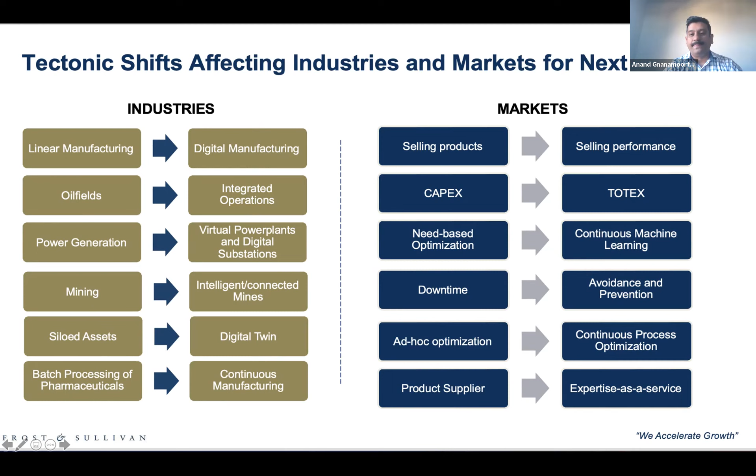This is a busy slide. There are several things driving adoption of IoT technologies and the changes happening in the manufacturing segment. Obviously the biggest one is digital. We see digital solutions being leveraged by the manufacturing segment, digital platforms coming up, and assets being integrated.

Number two, we are moving from capex to totex. We see focus on a service economy rather than a product economy. From a solution standpoint, number three, we are seeing a move away from proprietary technology - the traditional MES, DCS, PLC and SCADA solutions were proprietary. We are going more and more towards open standards.

There is focus on digital threads that can weave across the different silos in the company and provide a unified solution. We're seeing new business models - that's what the entire webinar is about, how channel and different ecosystems can help customers come out with new business models, looking at solutions or ideas on outcome-based solutions.

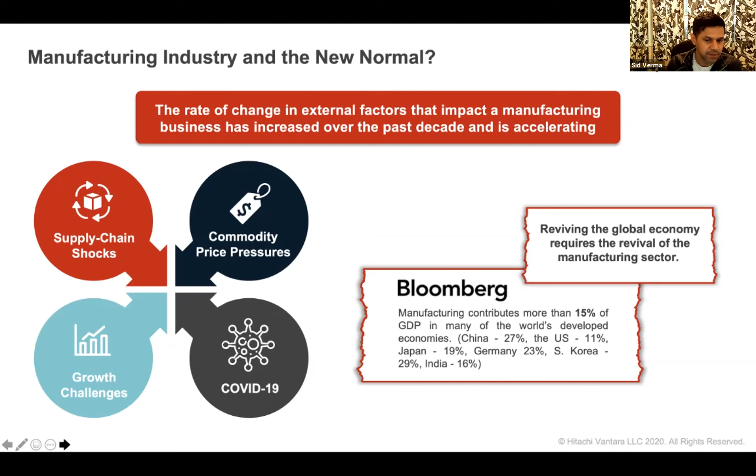So as we started believing this needs to be done, the important part is how do you start, where do you start, and where do you put your first steps in. I'll try to take the time today to talk about some of our own experiences, and maybe it will be helpful.

Next slide, please. So just to give you a background on Hitachi, I'm guessing Hitachi's name is quite familiar to everybody in the world. It's a big brand, 110-year-old Japanese company. It has a heritage across many industrial verticals. The Vantara business represents the digital business of Hitachi Limited, and brings over 60 plus years of IoT and IT experience to that industrial heritage.

Essentially, what I'm trying to communicate is we are also a manufacturer at heart. We have scores of factories, and they are also spread around the world. And we face the same challenges and dilemma as we try to transform ourselves digitally, and also try to deal with the same shocks that everybody else is dealing with.

Next slide, please. So I'll start with a description of what we call the intelligent manufacturing journey. This is, as you can see, a step-by-step process, but it typically is an iterative process where you learn and you improve. This is the journey that Hitachi has taken for itself as we have gone through our own digital journey. So we are proud to share some of the learnings as we go forward, and also improve as we go ourselves.

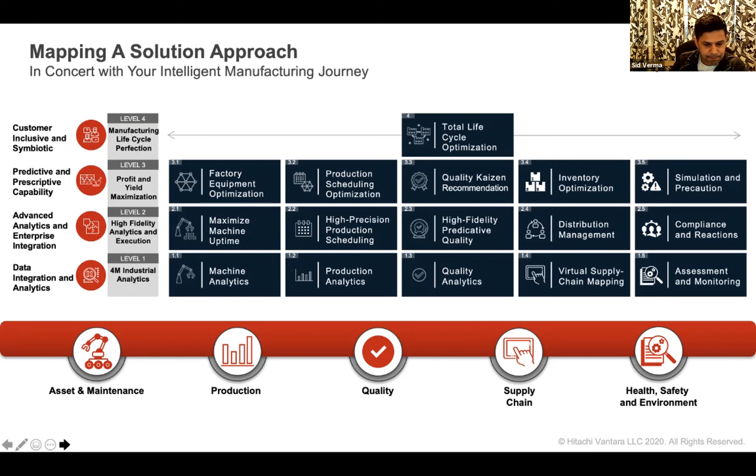So the solution modules, as I was showing before, are kind of a building block. We build organically as need requires or ROI requires, and they are interlinked in the sense that you can build on top of each other and start getting more and more value, getting up the staircase to value, as I was saying earlier. On a technology front, the way we build these things are microservices, so you can functionally and technically add it onto the system. And of course, these things can be deployed on the edge, on-prem, or on the cloud, whichever is best suited.

Some of the base capabilities you'll find here are technologically like a foundation, and some are functional. So we like to think about it that way, and then the functional elements drop on top.

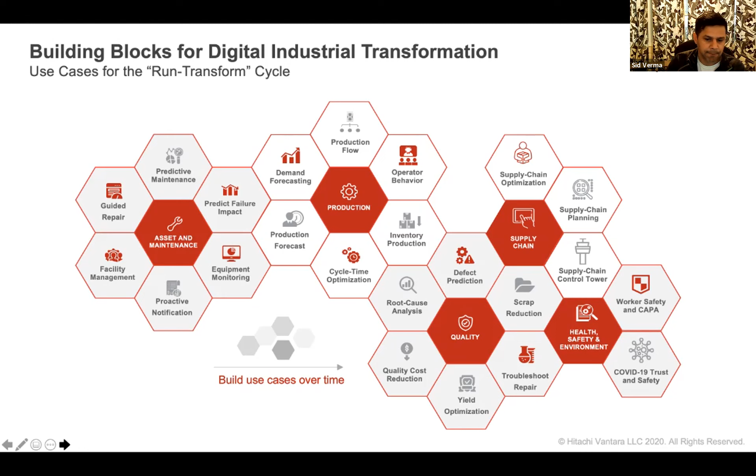So typically what we have shown so far helps you get started on the digital journey, like aligning functional elements to ROI for the client. But the important part then comes at how do you scale it?

Scaling has been a difficult element for most of the partners, our clients, and even the vendors. POCs work great, they show ROI. Scaling is where things start to fizzle out and you start losing the value. So for us, creating a path to scale is what we have started calling mass customization.

The important part for us as we start on this mass customization journey is to make sure we align to how the customer sees the world. On the right side, you can see they typically have their own environments in which they live and breathe, and functionally they're operating in those same solution areas - maintenance, supply chain, health and safety, quality. And they have officers and managers who run those areas.

For solution providers or transformation agents, we need to make sure we align our offerings and our sales to what the customer actually sees. So typically there are two challenges when you get into this.

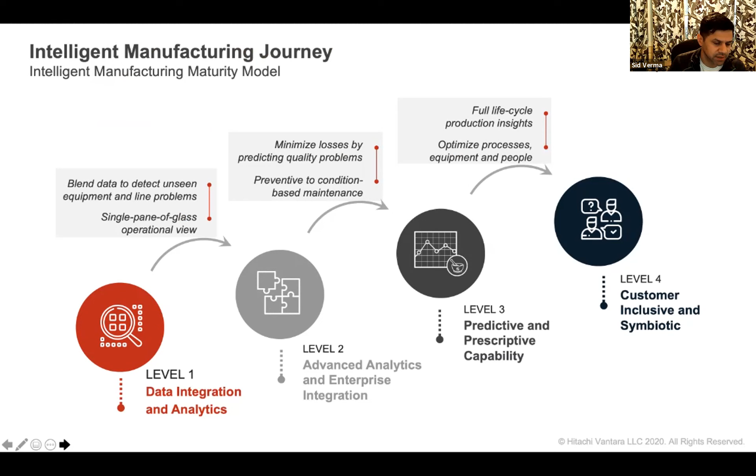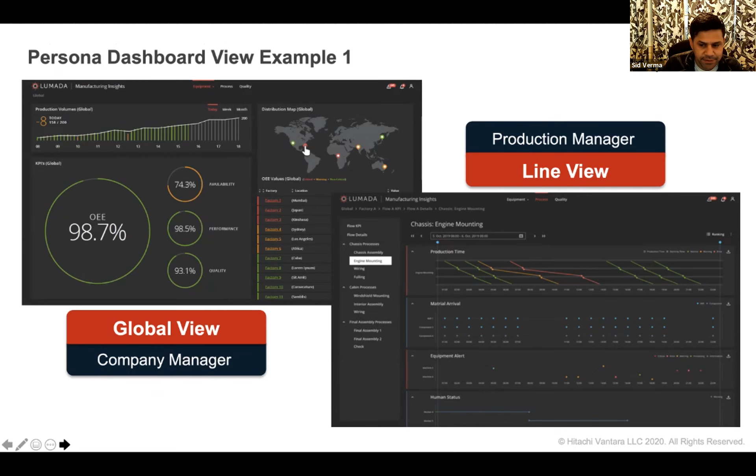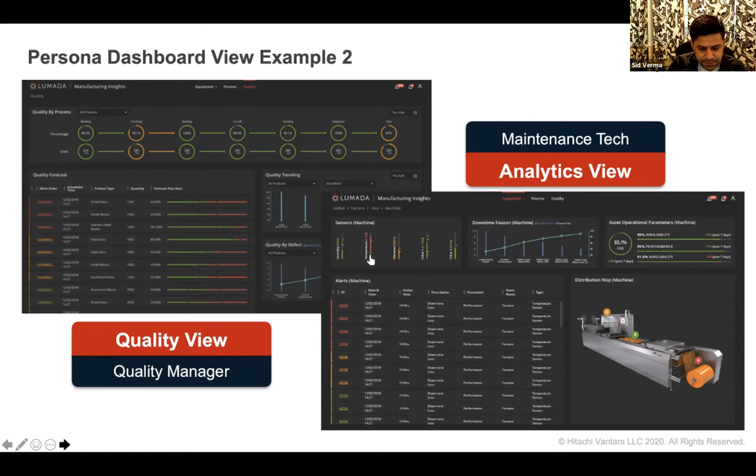Next slide. This brings me to the process of doing this. I gave you a general journey and how functional domains fit in, how you can use a solution set or a product. But typically a journey for us starts with discovery, because not everybody is the same and not everybody wants to start from the same point, and their problems are not always similar. So we start in a consulting fashion - a discovery, aligning the goals and challenges to what the customer's actual immediate needs are.

What we found is the next step typically depends on clients. We have a 4-step approach to looking at it: first, a digital optimization, a value-based optimization, where we look for where the most value is hidden in the process that needs to be leveraged or opened up using digital. So it could be spare parts, scrap management, or yield management.

The next one we could do is a business strategy element, which is a typical Industry 4.0 journey - how is everybody in the industry progressing, how are the benchmarks happening, like how Anand was mentioning some of those changes. We follow that journey, industry by industry, sub-industry by sub-industry.

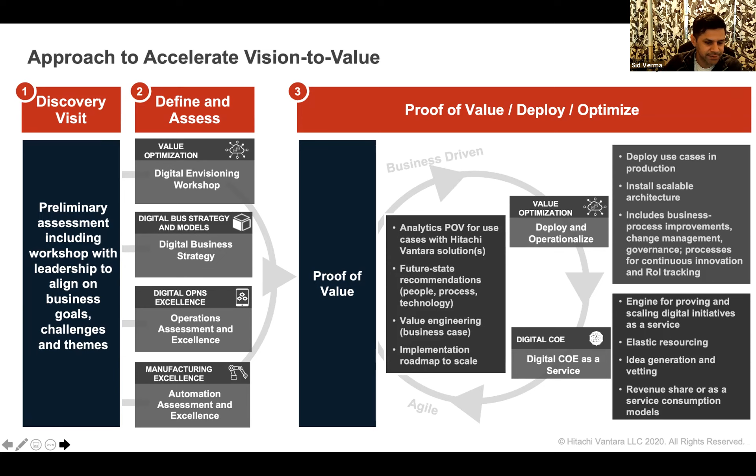Next slide, please. Just to show our own example, that we eat our own dog food - digital transformation is taken very seriously within Hitachi, and we have extensively used it in our own environment. To give you an example, our Omika Works factory in Japan was recognized as an advanced lighthouse by the World Economic Forum. They have taken these principles to heart and have got considerable improvements.

Just to bring the point that this is not a 6-month or 1-year journey - it has taken many years to get to this, and it's always a continuous journey where you keep improving. Next slide.

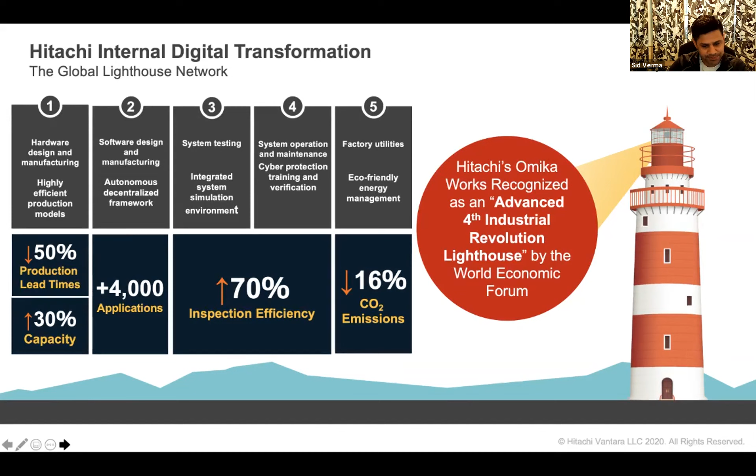So I want to take a little time to talk about one of the customer's use cases, a very traditional client, a mid-size automotive part supplier with 30 manufacturing factories that make parts for OEMs and have built over multiple periods, like 20 to 30 years. They face the same challenges as a typical manufacturing company: downtime issues, unpredictability, performance issues around machines, a lack of understanding of how OEE or operational effectiveness is for the units, and condition monitoring or maintenance that was kind of manual.

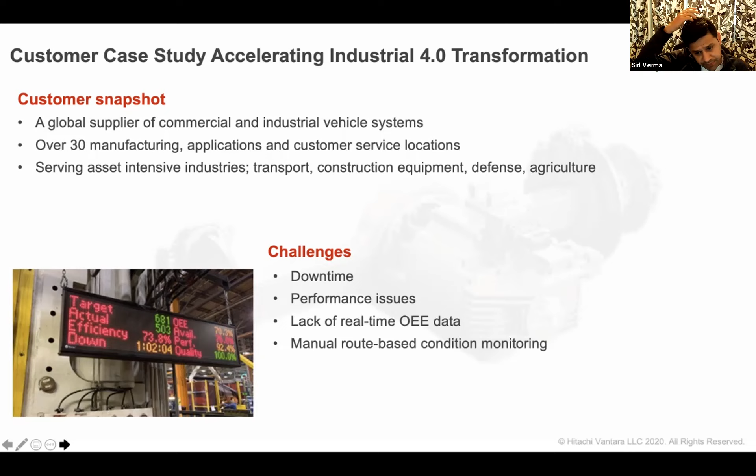So we started this journey for them, with them. Basically, we started the same way as I was saying, with the process. We started the discovery and assessment sessions, and they followed a more traditional Industry 4.0 benchmark and journey with us.

We quickly honed the expectations and ROI around two use cases, level 1 and level 2, which we defined as real-time operational effectiveness for all their important and key assets and machines. And then we went on the predictive maintenance journey, which required machine condition monitoring. What we were able to leverage was the base capability, the level 1 capability in our solution, and we were able to get those things set up relatively quickly. Then we went on to the OEE journey to maximize machine uptime.

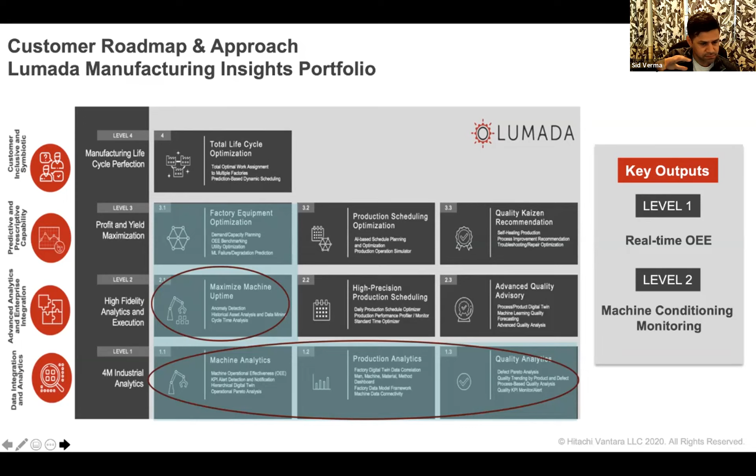With that, we got the data from the machine side and also some of the backend systems like MES, which allowed us to do anomaly detection in the process. And then eventually, once we got some data and analytics done, we were able to do intelligent alerting.

On the right-hand side, you see the predictive maintenance side being set up. As you're aware, in manufacturing, acoustics and vibration tend to predict like 50 to 60% of failures. So we had to co-create with our client a digital signal processing module, which allows us to do high frequency vibration analysis. We call it the digital signal processing submodule within our suite, and that allowed us to do prognostics, fault diagnostics, and analysis of the equipment.

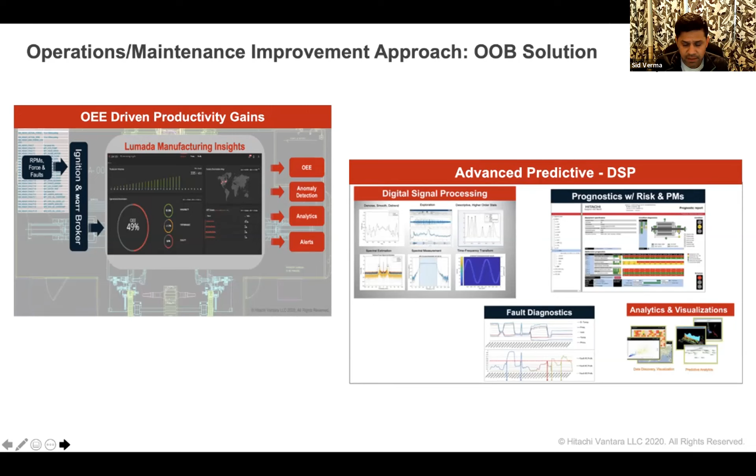We have defined some analytical models, like end-of-life calculators, RUL, health indicators, and failure predictions. We tune these to the assets for the customer, and they start giving predictive alerts. This is the next step beyond the condition monitoring I was mentioning, and those things will drive how the operator and maintenance happens in the field. Of course, we can adjust these models as machines degrade or change parts over time, and this is a way for us to build optimization on top of an operational platform like LMI.

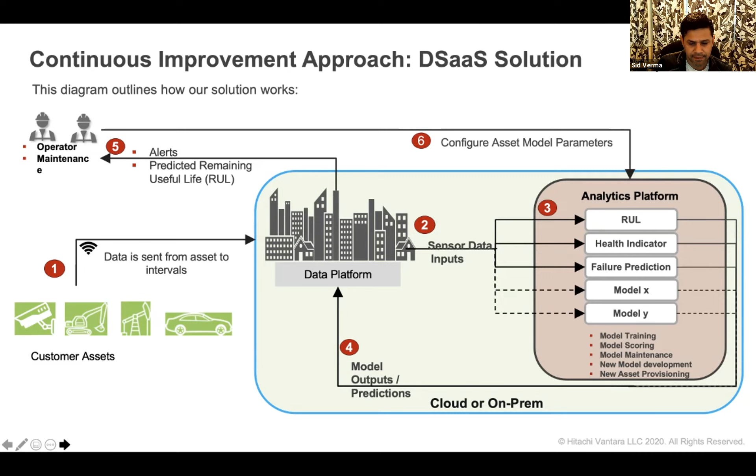At the end, the client was able to get real-time visibility of their production operations and also a good look at the critical failure modes and some predictability on it. So far, we've been able to considerably manage their downtime on some of the key machines, and the production improvement side has helped them improve the OEE on the setup by almost 2 to 3 points. Next slide, please.

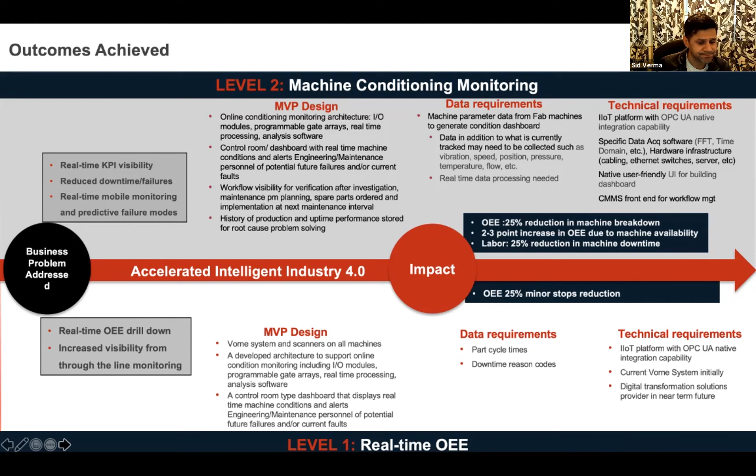What's important for us to show from this journey is how we fast track, deploy, and institutionalize some of the core elements that made us successful, both ourselves and our clients. I especially wanted to focus on small to medium client business factories. Traditionally, large companies have the budget, resources, and in-house groups, so they tend to run digital transformation quite successfully, and if you look at most of the market eminence, they are the ones leading the pack. So we tried to build something that a small or medium business can actually utilize and run on this digital journey. And just leveraging my first slide's message, the industry shocks and the pandemic have made it a burning platform.

So we need to enable some of our client partners to do this. So this is kind of how we were getting there. Basically what we have figured out is a defined roadmap that aligns with the functional use cases and ROI. We kind of have that pre-built, so we know where to start and what gives the best ROI.

From there, we always suggest having a long-term partnership with trusted partners and friends, which aligns to your own business objectives. Because even though everybody would like to do it themselves, no single company can do everything. You'll need multiple partners to do this.

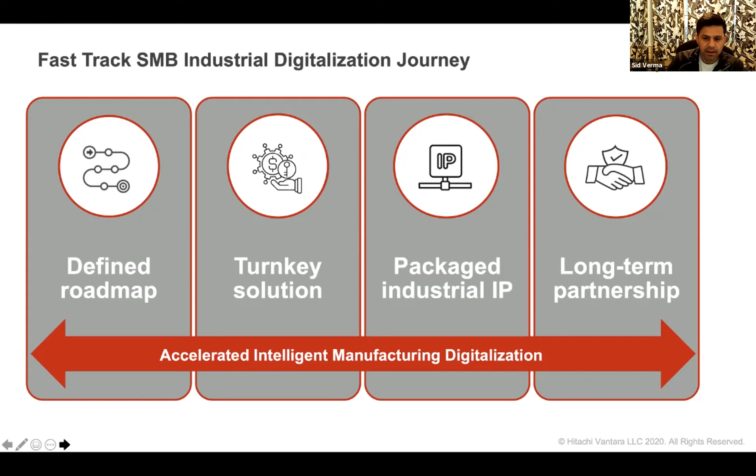So this is my last slide, just to conclude. I think the intent is to accelerate digital transformation in a very pragmatic approach. You need a journey, a partner which has some experience in this journey, so you don't make the same mistakes that others have done, and you don't get stuck in the analysis paralysis of a POV world.

And from there, pick the best use cases, do big and bold use cases, but keep in mind that this is not a sprint, but a marathon. You will have to orchestrate all the elements of your company in driving the value towards this.

So what we desired and really wanted to do was add those higher level parameters, things like process information, machine health, anomaly detection, using the analytics and the power of the Lumada Manufacturing Insights system. That's where the magic really started to happen. We do have a quick video to show you that'll hopefully give you a taste of what this does and what it's hoping to be. I'll say this project isn't quite complete yet, but we're approaching the finish line.

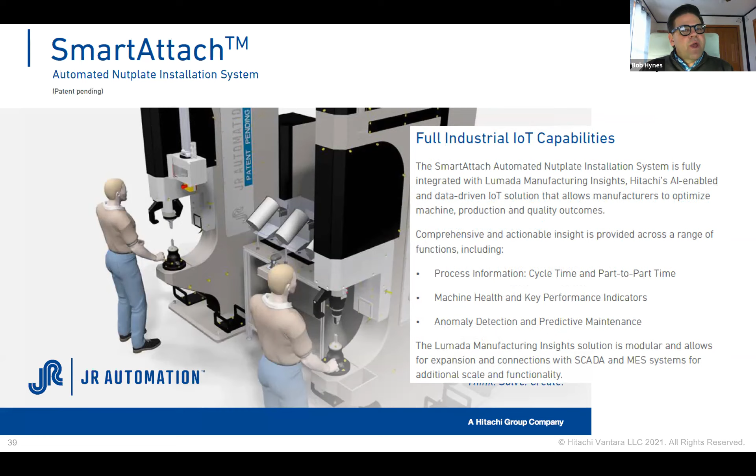JV, why don't you go ahead and start that video? All right, I'm going to try. I'm not promising anything.

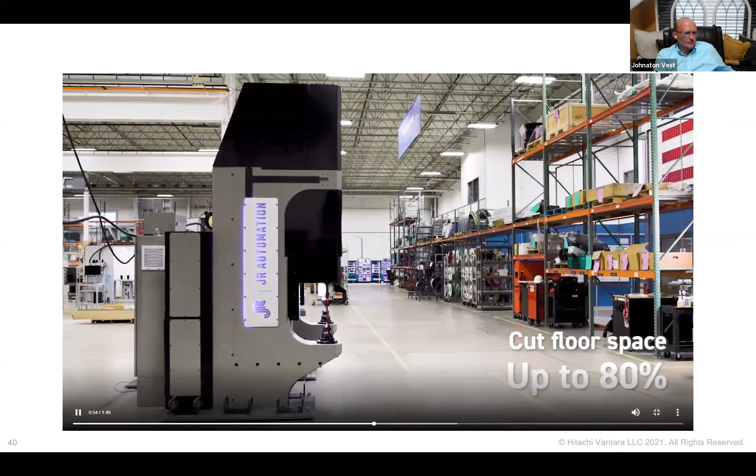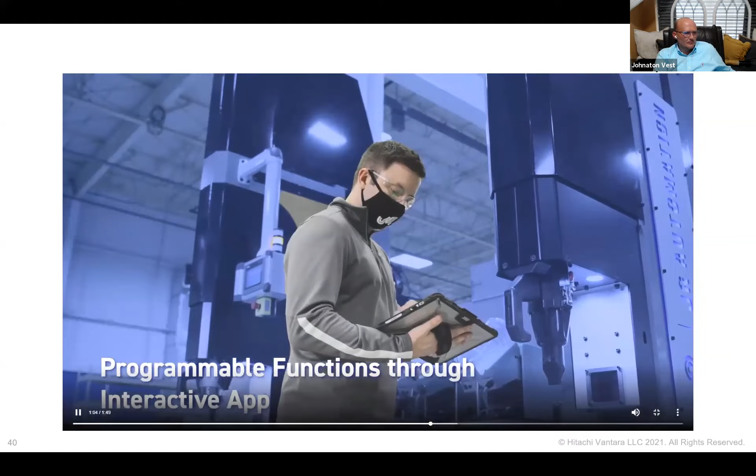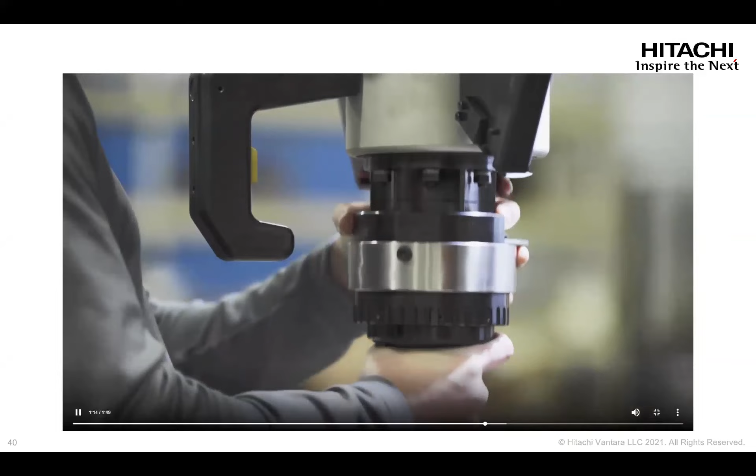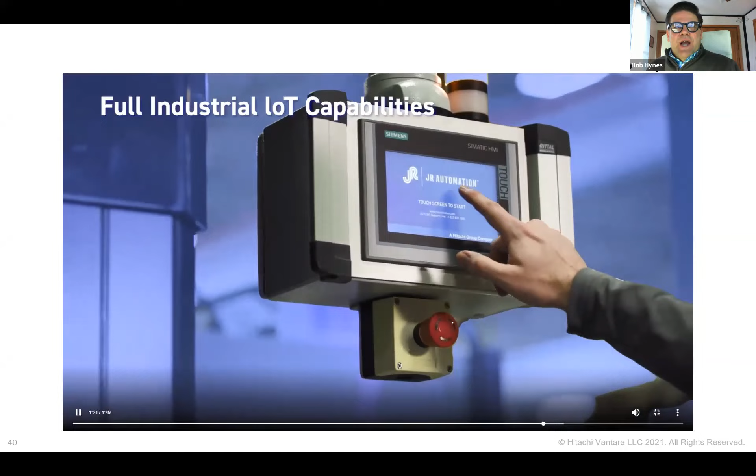Should we play this with sound? I think it has sound. For some reason I could not get it to play today. No worries. I was not narrating because I wasn't sure if the sound was going through, but that would have been annoying.

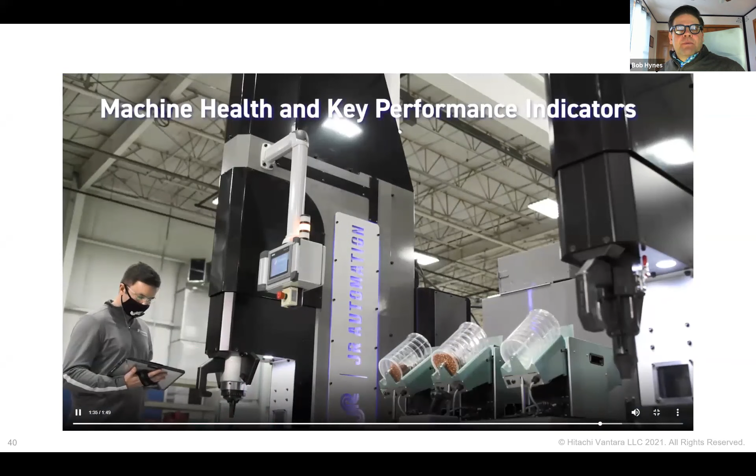But hopefully the visuals here help describe what the machine does, and give a little taste of some of the digital enhancements that were made as well.

There we go, so we can pause it now I think. So with that, I'll turn it back over to JP. He can talk about the digital piece.

Yeah, thanks Bob. So Jeff, we probably should have listened to your advice and let you share the slides, my apologies on the sound there. But as Bob said, what we realized is we had an opportunity sitting directly in front of us to collaborate on an industrial IoT solution.

In the beginning phase of this kind of collaboration, we're going to add basic to a little bit of advanced analytics to this solution. Since this is a brand new product, nothing that's been in the market today, as we begin to look at what's next, we'll start looking at more advanced analytics, predictive maintenance, things like that. But in the beginning, what we'll do is visualize all the sensors - there's hundreds of sensors that sit in this machine - threshold notifications, alarms, anomaly detection for a lot of the KPIs.

I think one of the things that stood out to me as this partnership grew is the different lenses when you think about industrial IoT - an IT side, as Vantara, and an OT side, as JRA - the different frames of glasses that they see. Normally when we go into a customer from Vantara's perspective, we look top down, right - how can we add efficiency to a manufacturing line, or how can we help with big problems.

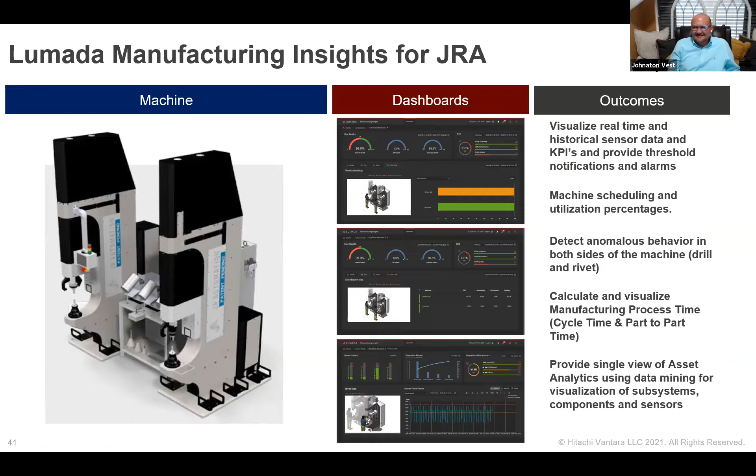I think that's really interesting, particularly the dashboards you're showing there as well. The machine itself is very cool, don't get me wrong, but I think the data that you're going to get out of that—and there will be questions about that, I assure you—I think is really interesting as well.